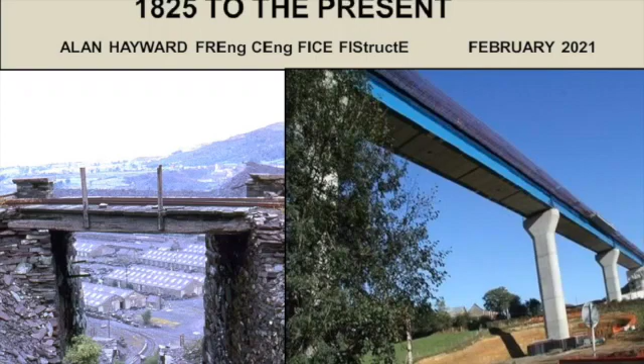Alan Hayward is well known to many of you. His whole career has been in the design and construction of bridges. With over half a century of experience, he's designed and been involved with the construction of more than 200 bridges, and of those, 8 have won national awards. He started his career training with British Railways as an articled apprentice from 1957, worked for various contractors and a consultant, including overseas. When he returned to the UK, he was appointed Chief Engineer of Fairfield Mabey here in Chepstow. In 1983, he co-founded Cass Hayward and Partners, consulting engineers specialising in all sorts of bridges.

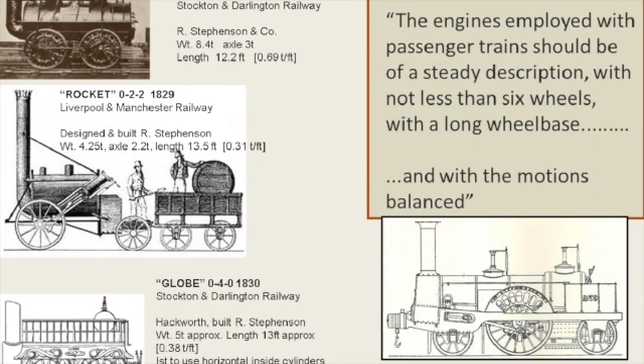Mr. Brunel comes into everything. He was famous on the Great Western Railway from London to Bristol, but he was the civil engineer. He ordered the locomotives and made the statement that no locomotive is to weigh more than 10.5 tons, and if it's above 8 tons, it must have 6 wheels at least. So that's what Brunel said.

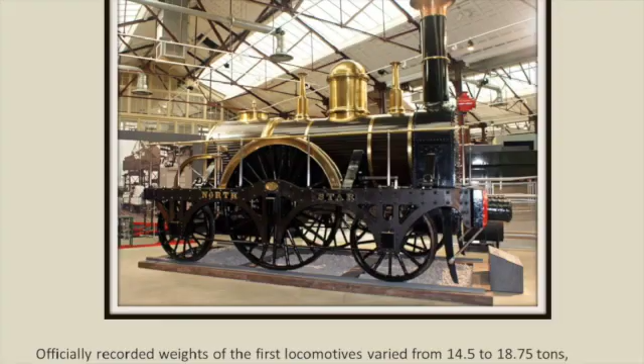But what happened was the first locomotives were a lot heavier. This is a recurrent theme, in fact—things get heavier as you go on, unintentionally. This famous loco, the North Star, built by Robert Stephenson, weighs 18.5 tons, so the weights are going up, and the axle load is 8 tons, so that's going up as well. An 8-ton axle is tiny present day, but it was very big at the time.

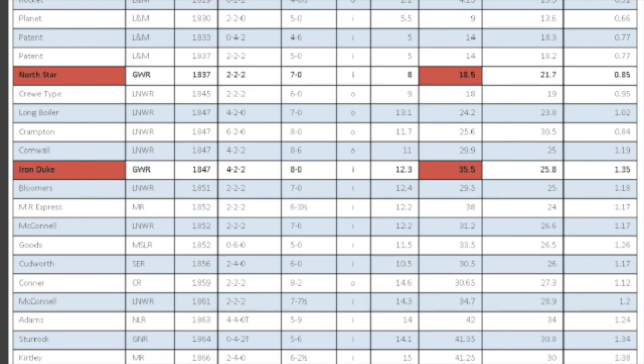I've done a bit of a survey of locomotives over the years. I'm not going to go through all these figures, but this is the middle part of the 19th century. The interesting ones to look at are the axle load steadily going up to 18 tons by 1868, and the weight of the locomotives also going up to approaching 50 tons. So it's a steady increase the whole time. But all these engines were built by all the different railways, of which there were dozens and dozens, all doing their own thing really. It wasn't really a joined up railway.

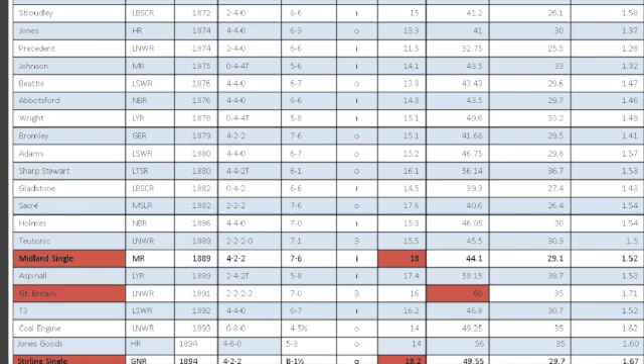Moving on towards the end of the 19th century, the weights of locomotives are going up—we're around 50, 60 tons now, but still around an 18, 19 ton axle load, so that's going up more steadily now. This famous locomotive, the Stirling Single, on the Great Northern Railway from London King's Cross to York—again, big driving wheel—and at least 2 of these derailed at high speed in 1895 and 96. Again, it's the high axle load on doubtful track. This is a recurrent theme.

Just looking at that engine, you can imagine the hammer blow you might get off that. All the hammer blow is on this single axle, so high hammer blow may well have contributed to the derailment—we don't know.

Moving through the early years of the 20th century, the loads are still going up. We're up to a 21-ton axle and a nearly 90-ton weight of locomotive.

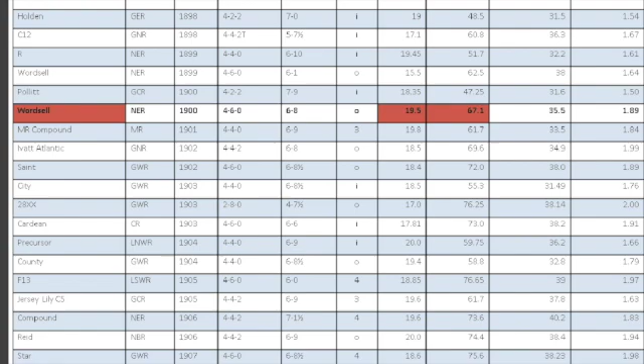And then we get really to the zenith, what I call the zenith of steam, in the 1920s and 30s. These are things some of you may recognize. 22-ton axle now, for locomotives built in the 20s and 30s—the real zenith of railway traction, really, between World War I and World War II.

This moves on towards the present day, and weights are going up, but only slightly now. We never exceed an axle load of about 22.5 tons, but the weights are up at 105 tons, the weight of the Duchess locomotive there, the fourth one up from the bottom. So that's the sort of development.

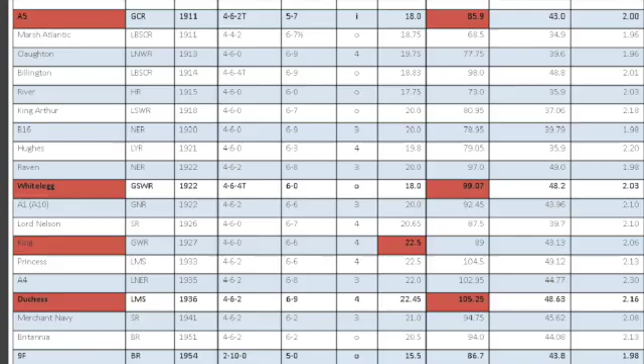And it's summarized there. At the bottom, if we move back, you see the 100-ton bogie wagons. These really came in the 1960s for coal traffic and oil traffic, weighing all up 100 tonnes. I'm speaking old British tonnes here, not metric tonnes—it would be 102 metric tonnes, but 100 old tonnes.

And obviously with a 25-ton axle load, higher than we've ever had before. The loading of these has really overtaken from the locomotives. Up to the 1960s, it's the locomotives that governed everything, the loading, and the carriages and wagons were really much lighter. But the wagons really took over the situation from the 1960s with these bogie coal wagons and oil traffic, and also ballast trains for permanent way work.

And what happened with diesel and electric locomotives from World War II, really—these have never exceeded an axle load of around 22.5 tonnes. But the critical one these days is the one at the very bottom. The Class 67 is more critical for what we call route availability, because it only has 2 axles to each bogie, so 4 axles altogether, whereas most of these diesels have at least 6 axles. Going back a few years, you see one there that's got 8 axles, called a 1 Co-Co 1, and the little wheel at the front was really to reduce the axle loading on a very heavy locomotive.

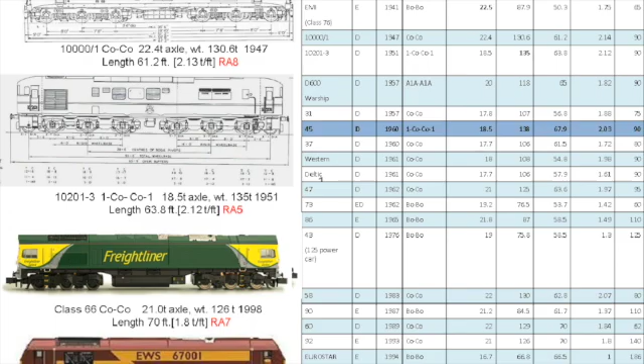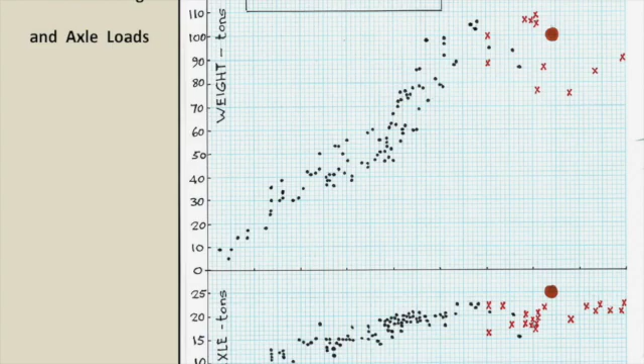This just summarises the development of the weight of locomotives. You can see the steady, almost constant increase from less than 10 tonnes up to over 100 tonnes. The big red blob is the 100-ton bogie wagon I mentioned. At the bottom, you can see the progress in axle loads - again, a steady increase over the years, but flattening off. But these 100-ton bogie wagons dominate now for the loading.

Right up until the 1960s, most of the goods traffic was this sort of thing. These 10-ton coal wagons were everywhere, only weighing 16 tonnes roughly altogether, with an 8-ton axle. So as far as bridge loading goes, really negligible loading.

But of course, these 100-ton coal wagons came along. I took that picture probably 9 years ago now. And of course, the coal traffic at the moment has disappeared. There is some imported coal, but hardly any mined in the UK. So that traffic's disappeared, which I suppose might be a relief to those maintaining bridges and track.

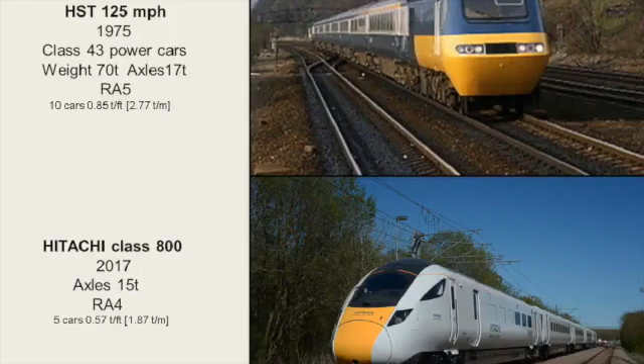But the modern trains we have now - we had the HST, the 125, came in the 1970s, only a 17-ton axle. That really helps for route availability, as we call it, RA5. RA10 is the top route availability for the heaviest rolling stock, i.e. the 25-ton axles, 100-ton wagons.

And this, the later Hitachi Class 800s, running west out of Paddington and north out of King's Cross to Edinburgh, are only RA4, so a very good rate of route availability. On the other hand, they're going a lot faster, so the impact effects are larger.

So moving on to the bridges now. This just tries to summarise some of the developments over the years. In the early years, we had cast iron, used extensively for beam bridges, and or masonry arches, or timber. There were hundreds, if not thousands, of timber bridges all over the system, including many famous ones by Brunel in the West Country. And there are still 9 of those in mid-Wales, actually. But masonry arches, of course, have stood the test of time.

Cast iron, of course, was taken out, which I shall come to. And then you've got at the bottom left what came in - wrought iron and steel, with a very popular method called troughs, where you have the rails set into longitudinal timbers instead of sleepers, sitting into troughs. That was a very economic method of construction, giving you the minimum construction depth. The depth from the rail level to the underside is very shallow, so that meant you could get good headroom over rivers and small tracks and so on. So a very popular method of construction.

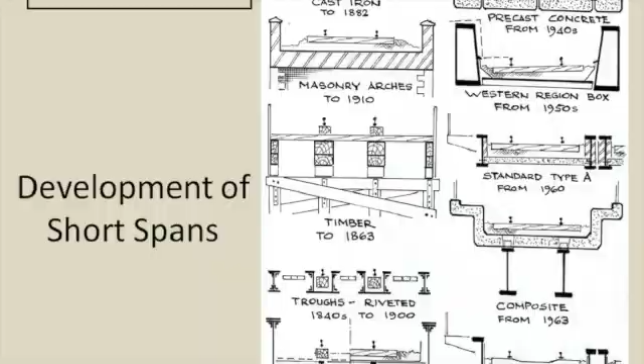Masonry arches, especially the masonry ones and brick as well, are really good for durability. The disadvantage being the headroom, of course - it's very restricted.

Now, I mentioned timber viaducts. There are 9 of these in mid-Wales. This is one of them. These were built in the 1860s and very cheap - the reason they went for timber is it was so cheap. The cost of these, I gather, was between 30% and 50% of the cost of a wrought iron bridge. Very lightweight, of course, timber piles, and took advantage of bad ground conditions really. 9 of them have survived. There are many more that have been taken down and replaced. Over the years, maintenance is quite a problem, and various timbers have to be replaced. These days, Network Rail are replacing using hardwood, greenheart timber, which has a very long life, whereas the originals were built in pine, which obviously has a comparatively short life, perhaps 20, 25 years.

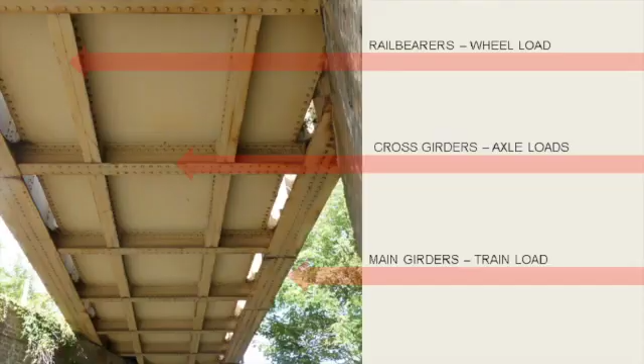Just a typical underview of a typical wrought iron or steel bridge of perhaps the 1870s to 1900. Typical construction - main girders at the side, which is just a half-through type of bridge, cross girders and rail bearers directly underneath the rails. You would sometimes have ballasted track on top, or sometimes longitudinal timbers. The rail bearers are of course critical for wheel load - they're designed entirely for a single wheel generally. Cross girders are critical for axle loading, single axle, whereas the main girders are critical for a whole train - that's pretty obvious. The bearings, of course, are decided on the train load. Notice the bridge is very skewed - there are lots of skewed bridges, and skewed bridges over the years tend to give problems. Things tend to twist, and you get funny things going on at the bearings. But it's a typical method of construction, and there are hundreds of these still around - riveted construction, of course, not welded.

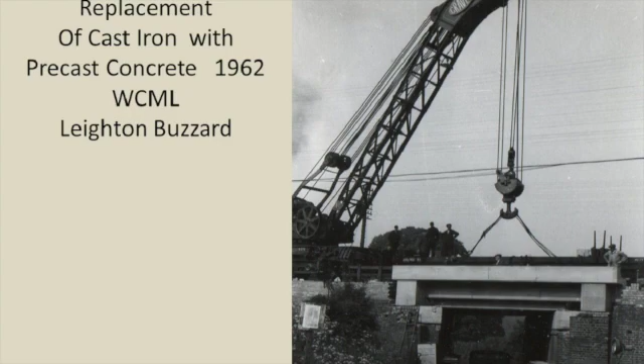Cast iron has survived in places, although it was banned for new construction in around 1870, and banned totally in 1891. Some cast iron beams do survive as edge girders, where they don't carry rail traffic - here you can see one carrying a parapet. I mentioned cast iron was banned totally from 1891, but it didn't happen very quickly - it took about 70 years. This is a bridge I was involved with - I designed this in 1962, replacing cast iron with precast concrete units. This was on the West Coast Main Line. It's staggering that this cast iron did survive until that time.

I mentioned the typical standard type A bridge from 1960 - there are many of these all over the rail system. They were often put in to replace trough construction with longitudinal timbers, which is pretty dreadful for maintenance - the timber tends to rot inside the trough and you can't see what's happening. Moisture collects in there, and the trough sides are not accessible, so you get corrosion, and the whole thing is bad news. Adjusting the permanent way is also a problem, and there have been quite a few derailments to this day - there was one in the last year on longitudinal timbers.

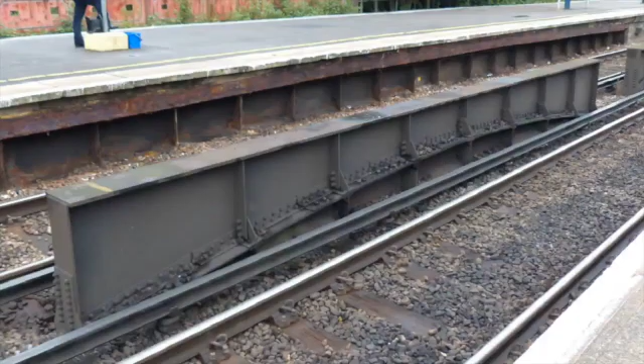This sort of thing has gone on over the years to strengthen bridges. This shows what's called top hat strengthening - there's an old bellied girder originally, and then this additional top hat has been placed to strengthen it. Not ideal, of course, having the girder in what's called the 6 foot space between the rails, especially where you've got the southern region where you have the conductor rail as well. Not an ideal thing for maintenance or accessibility, but sometimes it's what you have to do.

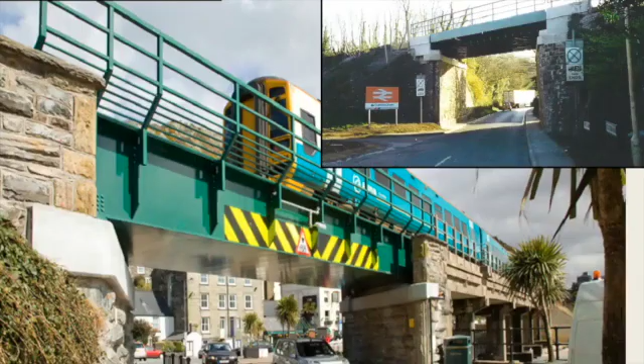I mentioned the U-deck, which has come in from 1997. The very first one we did was at Dunton Green, south of London, and that had an all-steel floor, whereas in later editions we've used a composite floor. The advantage here is the underside of the bridge is totally flush, so it's good for maintenance, avoiding traps for pigeons to build their nests, and quite a nice looking bridge, we think. That's become now a standard network rail design, adapted from our starting point, I suppose. Some of the details they've got on the standard I wouldn't do, I have to say, but there it is. We tend to use our own details.

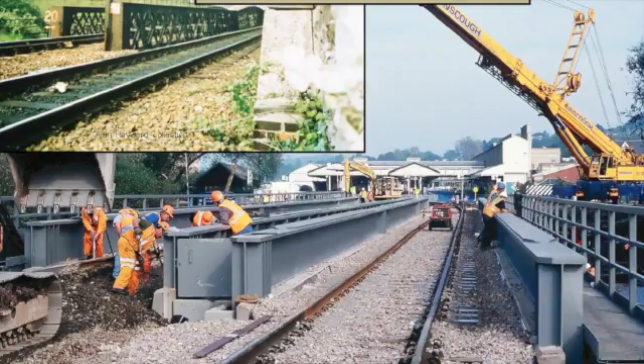And the modern sort of half-through type bridge, you would call a D type, I guess, with a single track between two girders. That, in fact, replaced the River Exe Bridge at Exeter, replaced a lattice girder bridge where there were some brittle fracture failures in some of the members there. So that bridge had to be replaced.

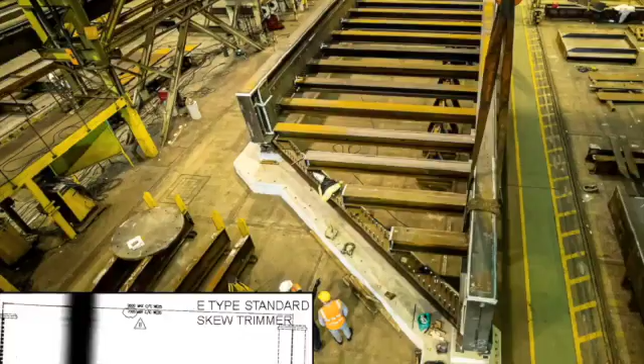Now this is a very recent bridge, in fact on the North Yorkshire Moors Heritage Railway, recently constructed, of what we call the generic E-type, which is an adaptation of the E-type really developed in the early 1960s. We've got our own version of this. I tend to use this detail for the end trimmer - I call this a sit-on trimmer. You can see that the short cross girders just rest on it, so the connections are very easy. And the trimmer goes underneath the main girder, with the bearing underneath the trimmer. That really simplifies the construction.

The little shot bottom left, there's a diagram from the Network Rail standard, where the trimmer they use on skew bridges has 3 bearings - that's to limit deflection - and the main girders have their own bearings. So you've got no less than 5 bearings at the end of the bridge. Well, why have 5 bearings when 2 will do? Trouble with 5 bearings - do they all fit and carry the load you want them to? I somewhat doubt that. So this is a detail I've used on a few bridges now, and it seems to work.

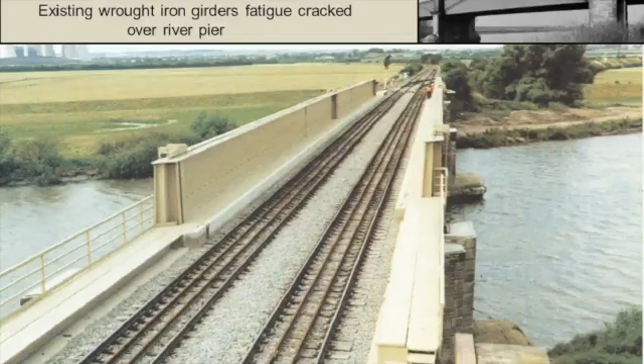This is an example of another one, Gainsborough, in the 1990s, and that has in fact got sit-on trimmers underneath the main span, the main 2 spans there, and underneath these approach spans at each end as well.

And that replaced a very early box girder bridge of 1849 by, I want to remember his name - famous designer, Forth Bridge, Fowler, John Fowler, yes. Wrought iron box girders continuous over the intermediate support, but in the late 80s, early 90s, they discovered some fatigue cracking over the top flange there, so the bridge became life-expired, so it was replaced by this generic E-type, I would call it.

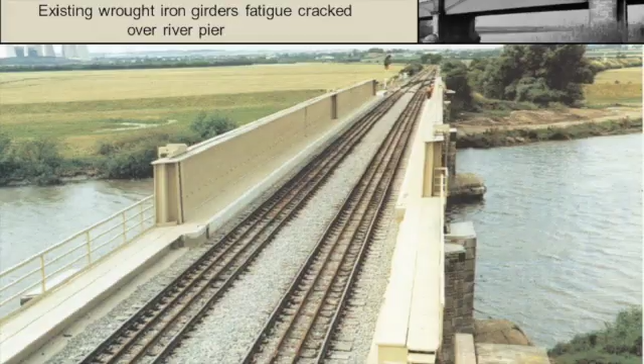Moving more to the present then, high speed has come along. High speed means faster than 125 miles per hour, and some bridges on the East Coast main line have been designed for higher speeds, and of course HS1 was designed for higher speeds of 186 miles per hour, and of course HS2, which is now under construction, will be even faster than 186.

And this effect of vibrations has been known. In France, they found it dislodged the ballast or made some of the ballast unstable, like quicksand, if you like, which is quite dangerous, of course. So to cut that out, they've introduced new criteria for high-speed trains, and that generally means stiffer members. So the members under the floor of the bridge are stiffer to cut down that effect. And also the other effect is comfort of passengers - when you're travelling on a high-speed train across the bridge, you don't want your cup of coffee in your lap.

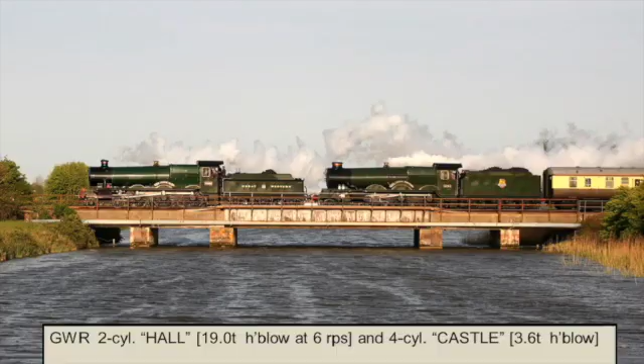I hope on the next batch of bridges the British contractors can get in. So on to bridge loading now. We know the weights of the locomotives, we know something about the bridges - how are we going to design them?

Bridge loading - I've put this on to show that when you've got 2 steam locomotives, you've got some pretty hefty loading on a long span. These locomotives look pretty identical, don't they? But they're different. The one on the front is called a Hall, 2-cylinder, and that gives you a lot of hammer blow because you've got unbalanced motion. The hammer blow is in fact 19 tons on those driving wheels, whereas the latter engine, the Castle class, has 4 cylinders - 2 on the inside, 2 on the outside - and that gives you a balanced system. Everything balances out, so you don't need so much balance weight on the driving wheels. The hammer blow is only 3.6 tons compared with 19. Makes a tremendous difference to the suitability and capacity on bridges.

I mentioned this before - axle loads govern short spans, locomotive or engine loads govern medium spans, perhaps a 30 foot. I'm sorry if I keep using feet and inches, it's a bit old fashioned, I can use meters. Train loads, of course, govern the longer spans where a whole train occupies the span.

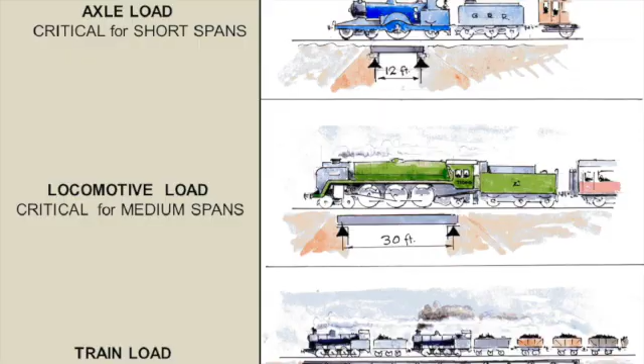So what did people do in the early days? There was a statement made at the opening of the Royal Albert Bridge - that's Brunel's famous bridge across the Tamar. Colonel Yolland said that the normal train loading was equivalent to 1 ton per foot run, and that was what people were doing at the time, the 1830s, 40s and 50s. All they were doing was getting the weight of a locomotive, say 25 tons, dividing it by the length, which if it was 25 feet, 25 over 25 equals 1. So that was the design loading.

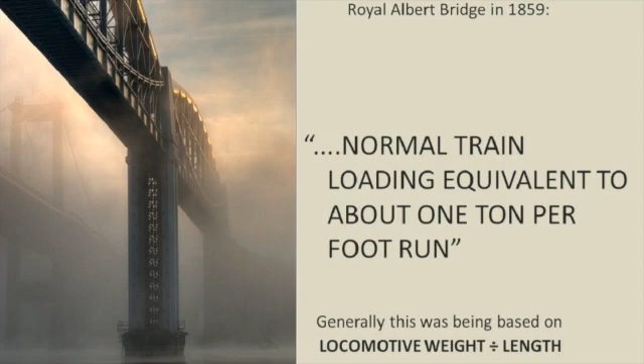They did nothing about the concentration of axle loads, nothing about impact. That was it - you just spread the weight of a locomotive uniformly. Pretty crude, very surprising if you think about it. The design of bridges was actually very advanced - if you just look at that structure, it's marvellous. Everyone knew about structural engineering, how to design trusses, plate girders and everything. But when it came to estimating the effects of a train, it seemed to be totally missing. I think it was because these guys were coming in from building canals and things like that - they weren't really used to high-speed trains.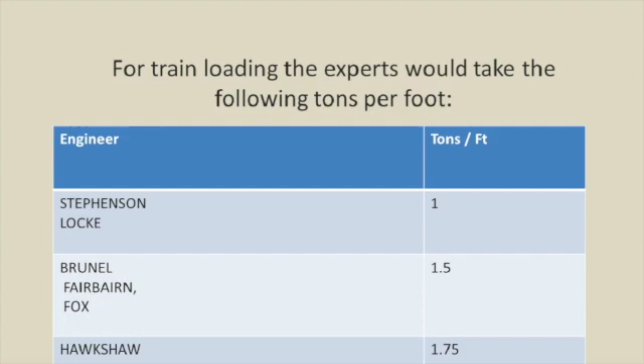So there was a big inquiry about it all, and the experts were called in. What do you do about train loading? Stephenson and Locke said 1 ton a foot. Brunel, Fairbairn and Fox had a bit more, 1.5. And Hawkshaw, who was always a bit conservative, said 1.75. But people were doing their own thing, and that was all they were doing - just the weight divided by the length, with no allowance for impact or anything. Very surprising.

Joseph Locke, another famous engineer with a lot of railways in the northwest of England, said he had heard that the Midland Railway were ordering engines of 32 tons with a wheelbase of 16, which means kind of 2 tons per foot. He said, 'I think it cannot be. I would not consent to it running on any railway of mine.' That's what he said. But remember, at that time we did not have a joined up railway - it was all people doing their own thing. So Locke would only run his engines on his railway; it didn't join up to other railways to any extent. We didn't have a joined up railway system until much later.

There was a report produced in 1849 where they said the factor of safety they expected was a factor of safety of 6 against failure, which sounds quite generous, and I guess it was at the time. But that was a sort of compensation for the fact that they weren't allowing anything for impact, so they just used a very high factor of safety.

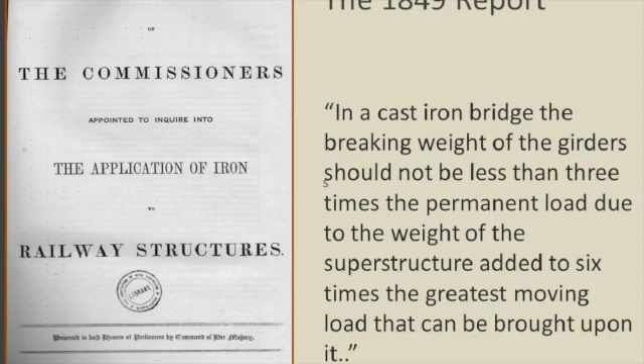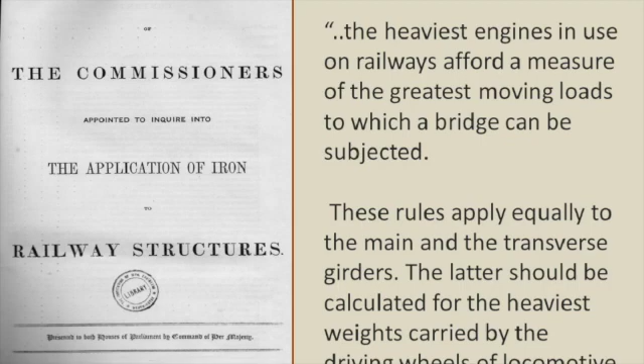The commissioners also said these rules equally apply to the main and the transverse girders, and the latter, the transverse girders, should be calculated for the heaviest weights carried by the driving wheels. So at last, somebody was worrying about axle loads, which is quite something, of course. That was an improvement.

And they also said something about impact. The dynamical increase in bridges of less than 40 feet is of sufficient importance to demand attention, and may even, for lengths of 20 feet, become more than half. So that's suggesting an impact factor of 1.5, which of course is quite an advance. Unfortunately, not many people took notice of that.

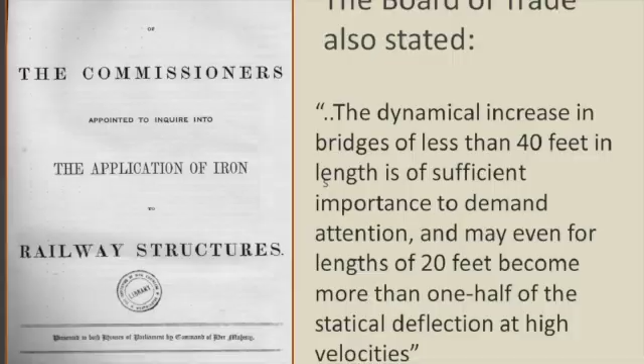People carried on in their own way. We move on to the late 19th century, and an organisation called the Railway Engineers Association, which was all the railways pooling their knowledge. They produced a curve based on different locomotives of different sizes and weights, plotting span against uniform loading, or equivalent uniformly distributed load, which we call EUDL. So this is the UDL equivalent of the different disposition of the axle loads.

That was produced with the idea that all the railway companies, who were beginning at last to get together, could do the same thing. But the interesting thing is the statement at the end, which is worth reading: it is, I presume, intended that the members of the association should use their own discretion in regard to permissible stresses to allow for impact and deterioration. So they were leaving it to individual railways to decide what to do about impact. It just shows the ignorance that was around at the time.

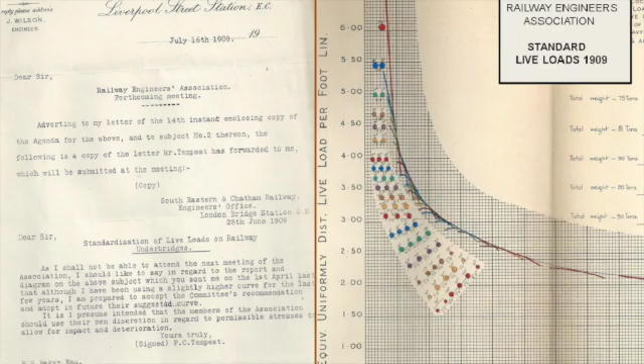I've got here a graph showing the different assumptions for EUDL, equivalent uniform distributed load, against span. You can see right at the bottom Stephenson and Locke with their 1 ton a foot. Then we move through various people, Stoney and Baker - that's the famous Baker of the Forth Bridge - producing their own curves for this.

Then this one shown is the Engineers Association of 1909, the green line. Above that is what's called the 20 units of RA1, which I shall come to, the standard loading we use for the route availability system now on the railway generally, including Network Rail - that's the current loading for assessment of existing bridges. And above that still is the present day loading that came in after steam trains disappeared. In 1973, what's called UIC 71, or RU, came into BS 5400. That's another big increase, and you can see the enormous increases.

And this is just static load - this has nothing to do with dynamics. It's just a static load, span against EUDL.

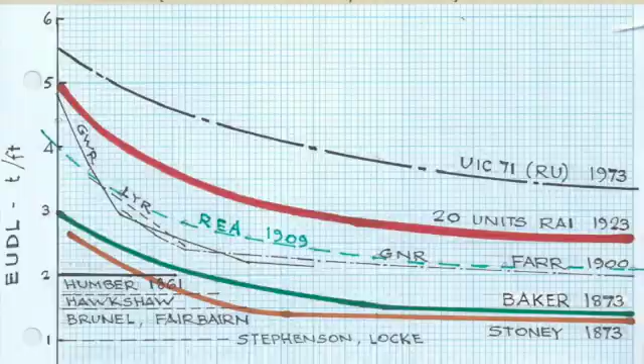But some formulae were around due to various sources. Pencoyd, an American formula - this was an impact formula, an increment. In other words, you add this little figure I to the static loading to get an increment, so you add 1 to this I, and 1 plus I is the impact factor. Then the Ministry of Transport did some tests in 1921 and came up with a little formula. And in the first edition of BS 153 in 1923, a very similar formula, slightly updated, was produced. So as late as 1923, this is all we had about impact.

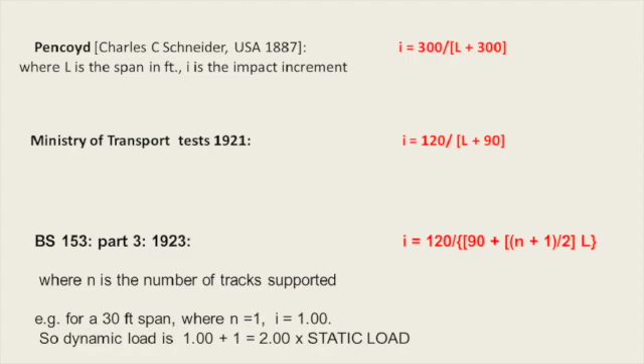But if I hark back to the commissioners, back to 1849, if you look in their Appendix B, which had 83 pages - it takes a lot of reading actually - hidden in that document in 1849 is this little formula and this little table. And that gives you really everything you need to know. It's the impact - it brings span squared into it, it begins with V squared, which is speed, and deflection is the deflection under the static load. That's taking into account all the imponderables, really.

At the time, of course, it was only applicable to short spans and very low speeds, but I've tried extrapolating it by curve fitting. I came out with a little formula, and it's actually pretty good. It's a mystery to me that this was produced in 1849, but nobody seemed to use it - probably because it was hidden in between 83 pages of small writing.

There were some tests done in 1921. Everyone was beginning to get alive to impact now, and they did a lot of tests of different locomotives on different places on bridges, with all these different test results. They produced a curve in 1921, which is the one I just showed you, a little formula.

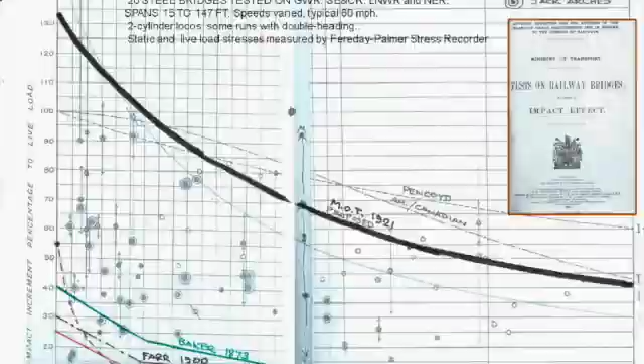So things were progressing a bit in the 1920s. In 1923, the first what we call RA1 loading. This again is just static loading, and it very much looks like two freight engines pulling a train of trucks, which is what it was. That loading was developed to represent typical loading at the time, on which you could base bridge design.

And that loading, funnily enough, is still used today. It's still used by Network Rail to assess their current bridges on the basis of an equivalent uniformly distributed load to this loading. It's just a load system which you convert to an EUDL. If you take 20 units of it, that's equivalent to RA10, which is the highest classification used for assessing bridges, and that's equivalent to a 25-ton axle load.

Going down in number of units, 10 units of this standard loading is equivalent to RA0. You just take 10 off. So 20 minus 10 is equal to 10, and 10 minus 10 is equal to 0. That gives you the RA route availability, and there's the equivalent axle load to that.

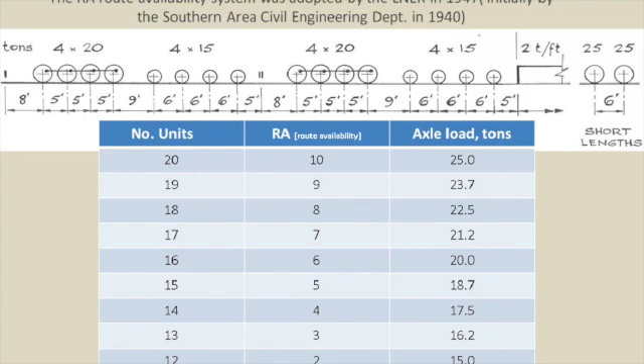So you can see you go from 25 tons down. It means that most of the current locomotives around, which have a maximum axle load of around 22.5 tons, are around RA8, sometimes lower. That's a typical classification of modern locomotives. The multiple unit trains, of course, are a lot less - more like a 16 or 17 ton axle load, so you're around RA5, RA4. So that whole system is still used today, although it goes back to 1923. There has been talk about updating it, but it's never happened.

So we come to the question of hammer blow. At last, there was a major breakthrough. After the First World War, there was a committee got together of the four mainline railways from 1923 to write a report and do some extensive research into the whole question of impact effects on bridges.

The main effect, of course, with steam locomotives at the time, was the effect of so-called hammer blow. This is due to the balance weights which are put on the wheels to counteract the reciprocating masses moving backwards and forwards, and this produces this alternating kind of loading on the rails. The bit above the static loading is called the hammer blow.

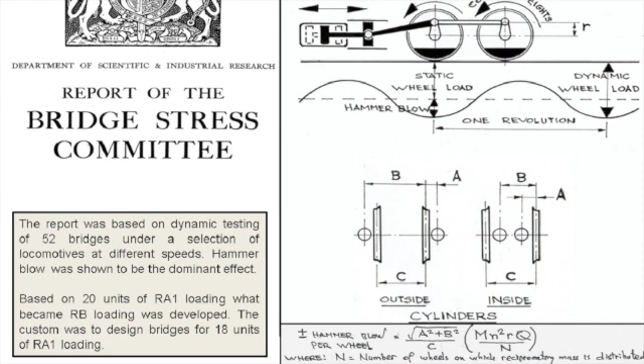Hammer blow is a bit of a misnomer - you imagine a guy banging with a hammer, but it's not actually, or shouldn't be, the wheels lifting off the rails. It's just a local increase due to the effect of the spinning wheel and the counterbalance effect of the balance weights. You can write formulae for these things, and there are various formulae around, but that's one of them. It depends whether you've got outside cylinders on the engine or inside cylinders - it makes a difference. They tested 52 bridges all over the railway system under many different locomotives, which had all sorts of different hammer blow characteristics, and came up with some results.

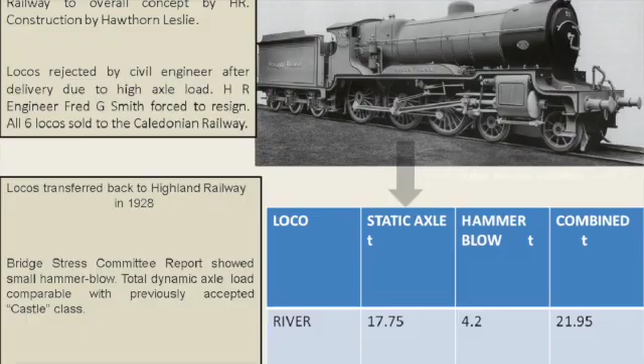Now, there are other effects, of course, not only vertical loading on railway bridges. One effect, particularly from steam locomotives, is lurching, which is really a rocking movement from one rail to the other that you tend to get. Particularly, 25% of the load on one wheel can be transferred to the other wheel. So that's a matter for design.

The Eurocode has got a similar thing, only it's not really the same, but it's called eccentricity of vertical load. It's saying that the track might be in a slightly different position, and that gives a somewhat similar figure. You could sort of confuse that and call it lurching, if you like, but it's not quite lurching.

There are other effects you get, horizontal effects on bridges, centrifugal effects, obviously on curved track - that's a fairly easy thing to calculate. Wind, of course, is a thing we need to think about. And a thing called nosing. Nosing: as the train gets along the track, it tends to shift so the flanges bear against one rail or the other, depending on discrepancies in the track and the rolling stock. So you get this effect called nosing.

That wasn't introduced till 1946, came along very late, actually. One of the reasons for a lot of the early bridges being rather weak in plan is that they didn't really appreciate nosing. So it's been the downfall of some structures. But that force was, from very early times, called 10 tons. It's a bit judgmental - I don't think 10 tons has ever been recorded. But it's now 100 kilonewtons in the Eurocodes, and it survived. No one's ever changed it.

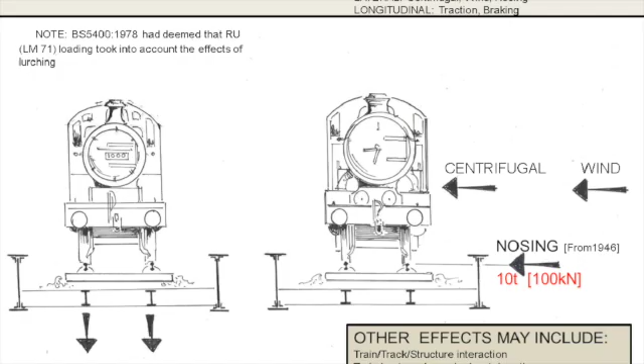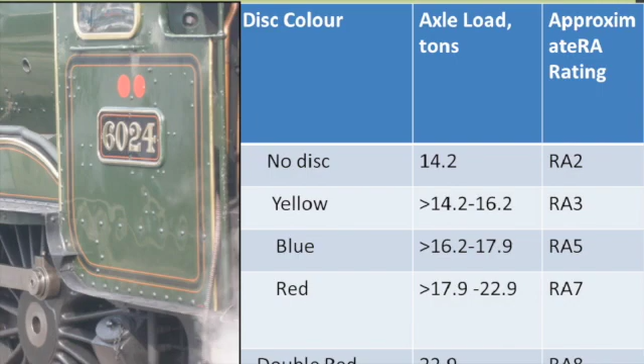Now, there was another system around on the Great Western Railway. Instead of route availability, they had this other system where they painted little circles on the side of the engines to denote their route availability. So this engine was called a King class, had 2 red circles, and that meant it was banned from certain train routes because its axle load was nearly 23 tons, and we would call it RA8 now on the rest of the system. These various other colours meant different routes, and they had a map.

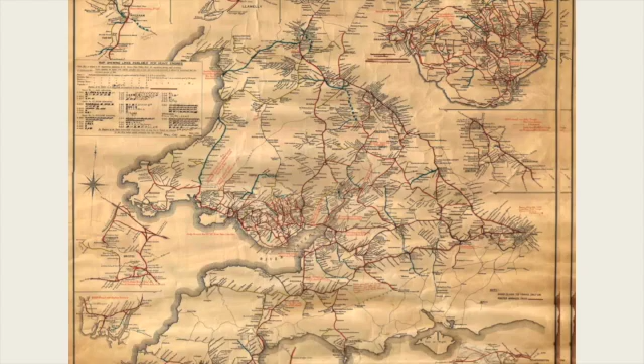A route availability map, going back to 1920s, showed these red lines, and some of them are double red, and you can see the Mid Wales lines are blue. These were where all the timber viaducts are that I mentioned, where the route availability was a lot less, so you had smaller locomotives with lower axle loads. So that system went on. I mean, it doesn't exist now.

So we come to the modern loading. What is it? Instead of the previous loading I've shown from 1923, with the getting rid of steam, a new European loading was developed. This was developed in Europe, but with a lot of involvement from the British as well.

So many of you will be familiar with this. It became part of BS 5400. It was called RU loading at the time. So that's what's used today, and it actually represents a double-headed heavy freight train hauled by diesel locomotives. That's what it represents in terms of bending moments and shears on a range of spans.

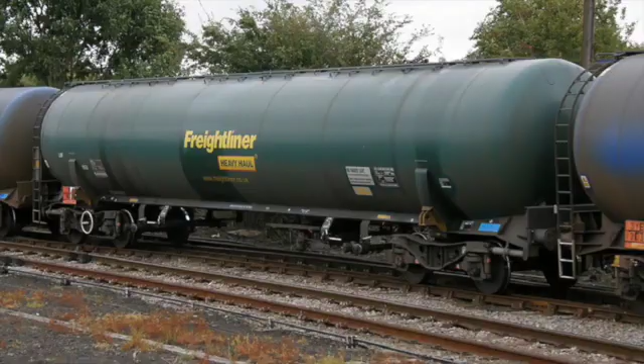What you do for designing new bridges is this phi, which is this very simple formula, but that is based on Psi1 plus Psi2 for a range of different speeds and trains. It was actually based on a 13-year-long ORE investigation in Europe, from different trains at different speeds: high-speed trains at 300 kph (186 mph), loco-hauled passenger trains at 155 mph, and heavy freight trains at 75 mph. They bundled all that together and ended up with a curve, like that. So that's the basis of it.

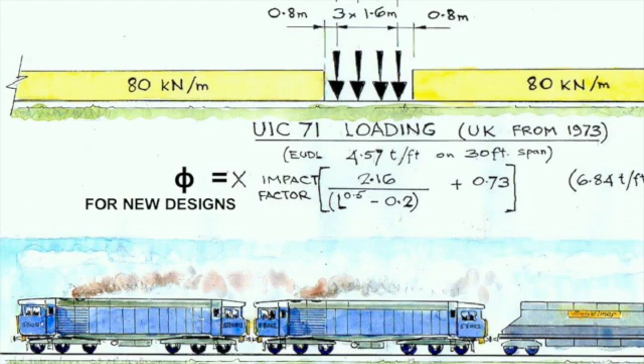It's quite important to know where that all came from. It's been written up in a paper in the Institution of Civil Engineers, 1974, a discussion chaired by Dr. Spindel, a famous railway engineer at the time, who was involved in a lot of this development. So that's the basis of the dynamic factors which went into BS 5400 and then into the Eurocodes, and of course is current today.

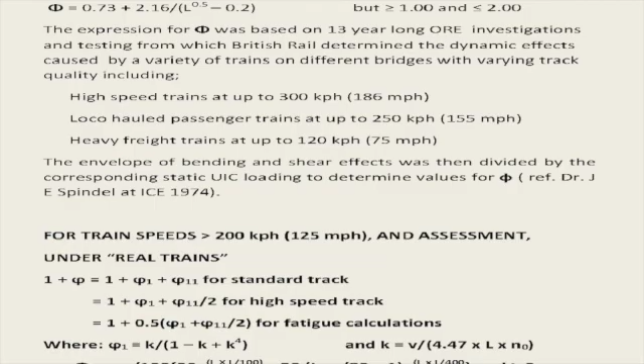So I've just shown there the dynamic increments, and you can see here this Psi1 and Psi2. It changes at 100 miles per hour, because when you get to a 100-mile-an-hour track, the track's maintained a lot better, so Psi2 is a reduced figure - that's why you get this jump.

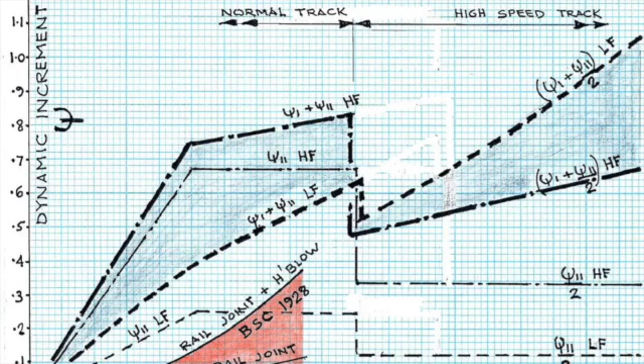Just the red hatched area is the steam train stuff - in other words, they were only going up to about 80 miles per hour. That's as far as they got. And the 1928 report I mentioned, the extensive testing of 52 bridges, this is what they came up with - the impact a lot less. But then they were only going up to 80 miles per hour. They didn't do much about the track irregularities - they did something about rail joints, but not much about track irregularities, in other words the Psi2 bit. So that explains a lot of the difference.

Now this is EUDL, equivalent uniformly distributed load, including dynamic effects - so that's everything thrown together. Span against EUDL, and you can see way back to the dawn of time you're on 1 ton a foot, and you should have been applying a bit of impact, as they said in 1849, up to 1.5 at short spans, about 1.2 or so at a 40-foot span, and then down to nothing for long spans. Whereas 1928, which is the RA system including impact, was called RB loading in BS 153. RB loading is in fact RA20 - 20 units of RA1 loading with impact for steam locomotives, and that's what you got there.

This was another early formula which was a bit conservative. Whereas today, the UIC 71 static loading is 71, but for modern bridge design, Network Rail current rules require you to multiply by 1.21. Why? 1.1 of it is for possible future traffic growth, and another 10% - I call it 10% for luck - is to account for possible difficulty in future maintenance, in other words degradation. So that's 1.21. Network Rail now makes you design to this, which is a very big increase. In a way it's trying to be long-sighted and looking to the future, but it does seem a bit conservative.

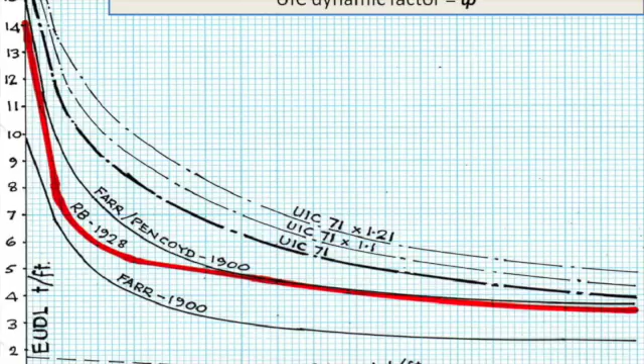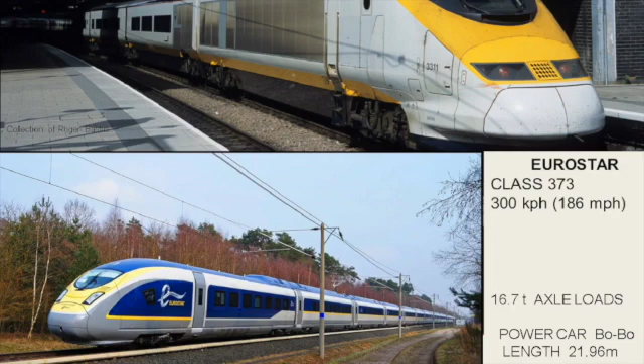And of course now we have high speeds - the Eurostar here, and the current version of it, speeds up to now 320 kph, over 200 miles per hour. So what do we need to do about that?

One of the things we have to worry about is additional vibration effects causing acceleration of the bridge. On ballasted track that can cause instability of the track, which could be dangerous - they've had experience of that in France. So on these high speed lines, more than 125 mph, more than 200 kph, we sometimes have to do a dynamic analysis, and very often will have to do that on high speed lines.

Whereas if the speed's 200 kph, in other words 125 mph, in general we don't have to do a dynamic analysis - we can do all the normal things, take the current loading, the LM71, and apply the phi factor to it, and that's it, that's all we need to bother about. But on a high-speed line, under certain conditions - does it comply with certain natural frequencies, etc. - you may have to do a dynamic analysis, and from that you get the acceleration and decide whether your bridge is okay or not. If it's not, you have to beef up the design.

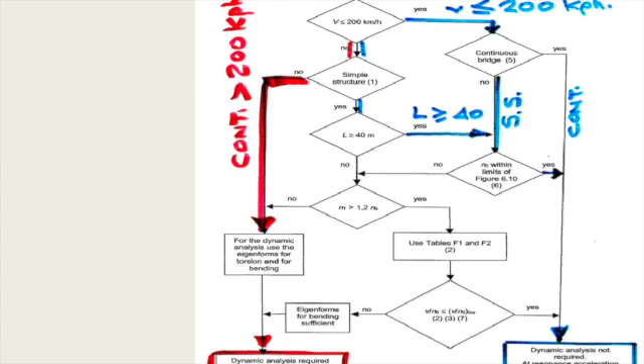So we can't run trains at more than 125 on those bridges without doing a lot of strengthening work. And some of these bridges have, of course, been replaced. For example, on the West Coast Main Line, some bridges have been replaced for that reason.

I've given this deck acceleration criterion, 0.35 G on ballasted track, whereas in France they found at 0.7 G they were getting destabilized ballast. So it's a sort of factor of safety of 2, halved it to 0.35. On direct fastened track, that is slab track, no ballast, which is what's being done on HS2 — they decided to go for slab track — the criterion there is 0.5 G, which is half of 1 G. At 1 G, the wheels could lift off the rails, so that's the idea, to avoid that. Factor of safety of 2, we'll have it as 0.5. I don't know how arbitrary these figures are, but that's what they chose.

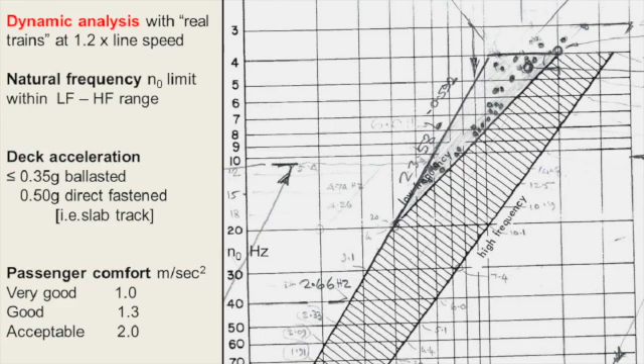If you go for this dynamic analysis, if you have to do it, you have to use the Psi 1 and Psi 2 up to these high speeds, and you compare the loading you get with what I call the traditional loading, and also do an additional fatigue check. So you can see, for high speeds, it's getting quite complicated.

I'll just come to bridge failures now. We're over an hour now, so I'm running out of juice, I think. Bridge failures, these are important. This one collapsed in Southern Ireland about 15 years ago.

Really it was longitudinal timber track, the old enemy, and pretty bad condition of track. The train came off and destroyed all these cross girders. No casualties — it was a freight train, fortunately, no passengers. But bad news.

I've listed here some of the bridges that have failed. There's comparatively few, actually, that have failed under traffic. You'll notice I haven't mentioned the Tay Bridge, the famous Tay Bridge of 1879. That failed with a train on it, but the loading that caused it was really wind, not really the weight of the train. There might have been a bit of wind on the train, but really it was a wind failure, and of course it was a badly designed bridge and bad workmanship as well. It's a well-known failure.

Of these failures, out of this little list, 5 were cast iron girders, and all of those 5 had a casting flaw, a blowhole if you like, in the tension flange. Modern technology could detect faults in cast iron by non-destructive testing, but in the early years you had no way of knowing when you had a flaw.

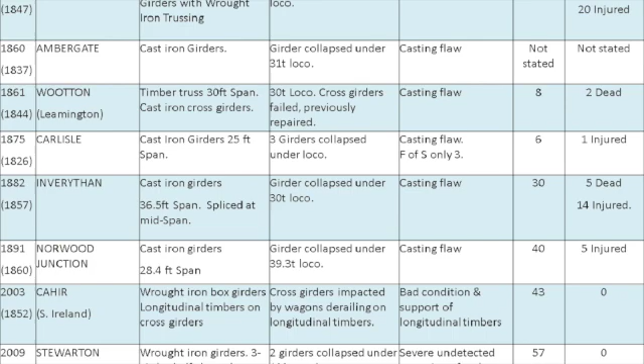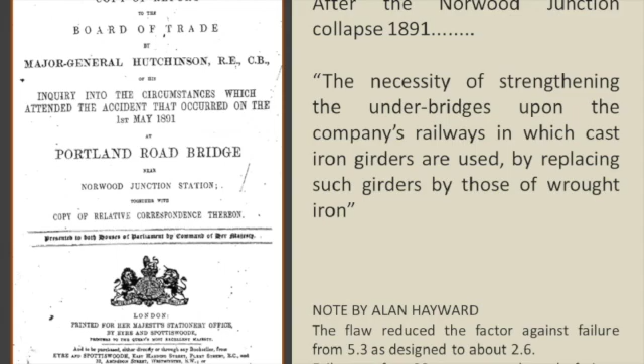After that, the Board of Trade produced a report saying get rid of cast iron - the necessity of strengthening the company's railways in which cast iron girders are used. That went national over the whole British rail system, and people began to replace their cast iron with wrought iron or steel. But as I mentioned earlier, it took until the 1960s to get completed.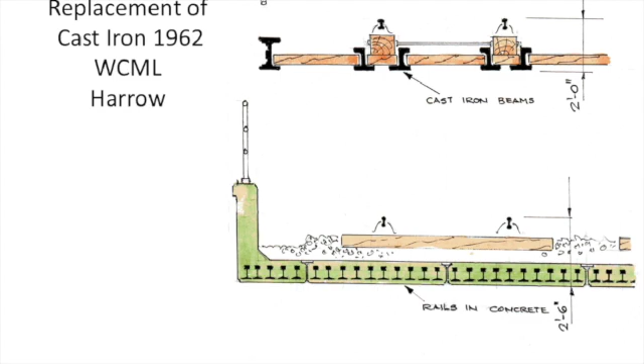That's just one I was involved in, 1962, on the West Coast Main Line - cast iron beams replaced by this unusual arrangement, rails in concrete, a very shallow method of construction. I often wonder about using second-hand rails in that configuration, but if any one of them fails, at least you've got 9 more to take the load. Perhaps not something we'd get away with now, using second-hand rails.

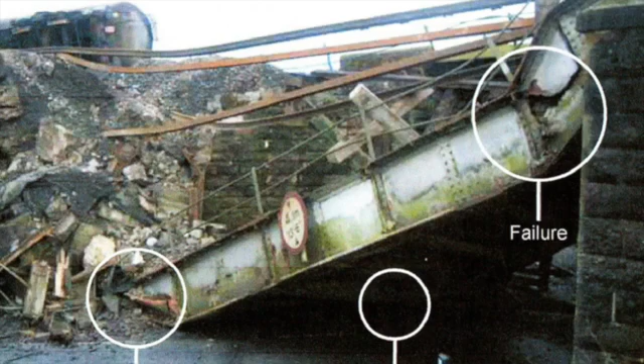This was the one I mentioned, 2009 - total, this was an absolute disaster. Under a freight train doing 57 miles per hour, 100-ton wagons with 25-ton axles, so it was our friend the heavy axles again. Notice the classic horizontal shear failure there, and this was due to a line of corrosion all along the web, because the inside of that web could not be seen for inspection.

There's the train across the bridge, 57 miles per hour. The locomotive got across the gap because the axle loads were only 21 tons, but the heavy wagons with 25-ton axles failed the bridge - four heavy axles there.

We got this classic failure. The problem was all this ballast, which was covering up the sides of the girders, and there was various sorts of timber cladding, stopping you ever inspecting it.

The other fault was that an assessment had been done of the bridge, assuming that the webs of the girders were half an inch thick. Well, they weren't - they were either 3/8, and for the edge girder, which failed the most, it was only 1/4 inch. So there was a mistake in the calculations for the assessment - not the original design, the assessment, which was a pity. Bit of bad luck really for Network Rail, because they'd already decided to replace the bridge, and the new one was already made, but it hadn't gone in. So meanwhile, the failure happened. That's been a real wake-up call, I think.

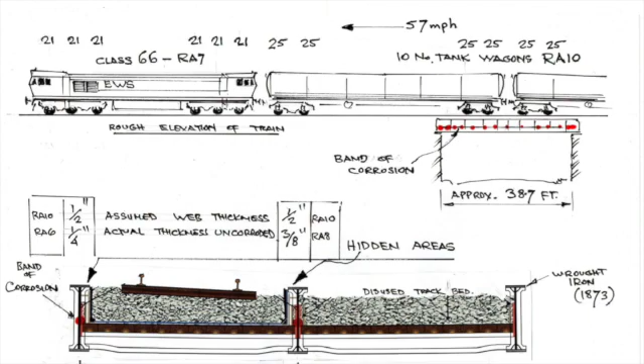The problem was lack of maintenance, and the timber wasn't in fact one bulk of timber - it was 3 timbers side by side, only screwed together very crudely. So you had literally a pack of cards. When you got a sideways force due to nosing, that would just push this sideways. There was hardly anything in the sides of the timber - remains of some old asphalt and a few timber wedges. The thing had been like that for months.

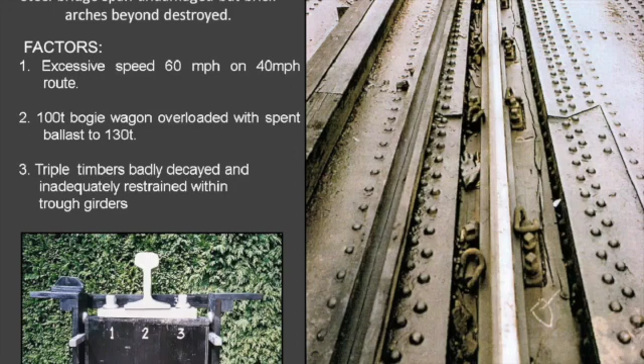There were 3 causes. The speed of the train was 60 miles per hour and it should have been 40, so it was overspeeding. The bogie wagon should have been 100 tons, but it was actually loaded to 130 tons with spent ballast - overloaded. And the timbers were badly decayed. I always think accidents are caused by more than one cause, and you've got 3 causes here, all contributing. But the one which really was the main cause is the bad timbers - it was an accident waiting to happen.

What about historic factors? We're nearly through now. Historic factors of safety - in the early days, they were assuming enormous factors of safety. On the other hand, we now have heavier loading. So did the high factor of safety compensate for the increase in loading? Well, the answer is, to an extent, it does. In cast iron, it doesn't - immediately the safety factor dropped off rapidly because the loading was going up, and you got to a point where you would get fatigue failure. Cast iron is hopeless in fatigue, and so that was totally unsafe and inadequate.

In wrought iron or steel, if you assumed a bridge - this is all an assumption - it just assumes 30-foot span girders, and this is only an example, if you like, and it assumed a certain dead load, which I've just assumed something.

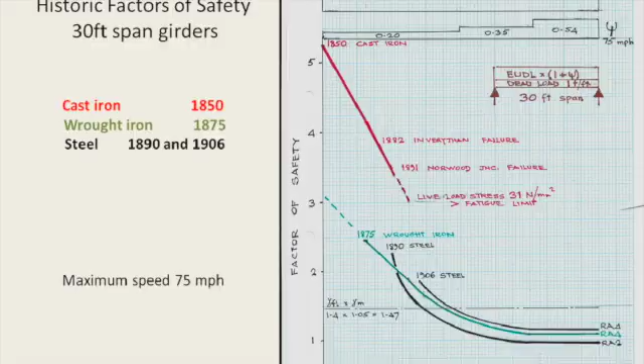It has meant that a lot of these bridges have survived, but with reduced loading. I'm going to finish on fatigue.

But the good thing about cast iron is, though it's got a poor performance, if you use very low stresses, it's got infinite life. Whereas for steel and wrought iron, the way the code works, you get a steadily diminishing curve, so you'll have a finite fatigue life - a much better fatigue life, but it does have an end to it. This is based on the previous code BS5400, which has been replaced by Eurocodes, but it would be a very similar pattern.

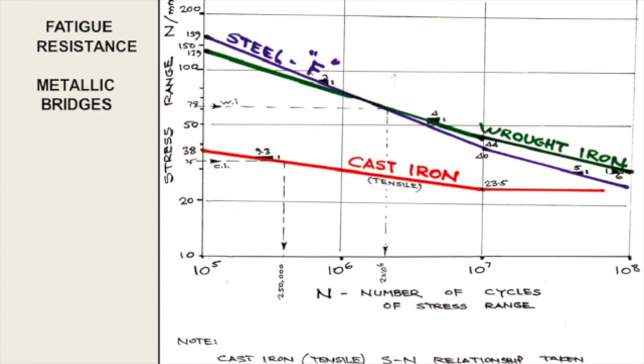I'm just going to finish with an example of fatigue. I've mentioned the standard box girders, originally called the Western Region box girders. These on the Western Region originated - they were called the Llantarnam type from 1969, because the first one was at Llantarnam, near Newport in South Wales. That's the first one, went in 1969. I think there were about 8 or 10 of that style, and then the design got modified later.

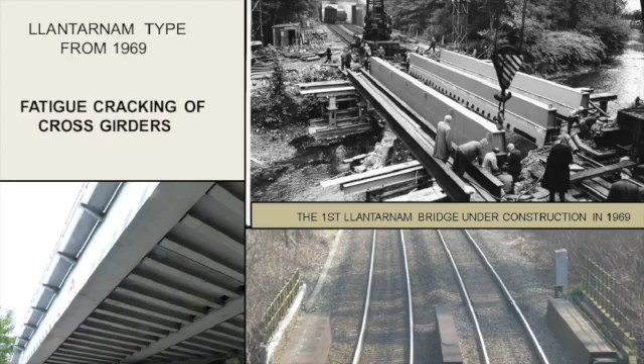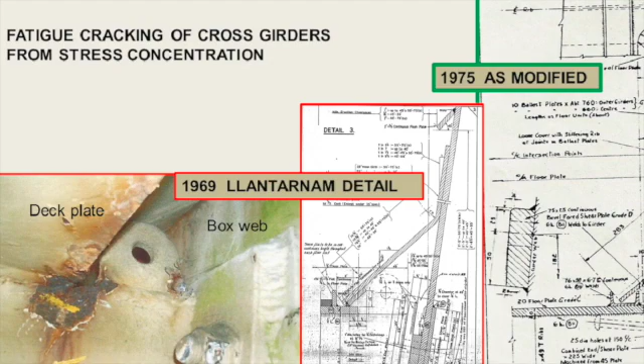And the Llantarnam detail is an unfortunate detail. You can see here the side of the box, a sloping side, and this is a ballast plate laid against it to keep the ballast away. The cross girder comes in here, and the floor plate stops just short of the end of the cross girder. So you've got a discontinuity there in cross section, an enormous discontinuity. And the thing is welded, of course. So any welding there, you will easily get a nick - a welding discontinuity - and then probably an inbuilt residual stress, which will be in tension. So you probably had an inbuilt problem from the start.

You can see what's happened - you can just see the fatigue crack, which has propagated down the web. The bridges haven't failed, but some of the cross girders have got this pattern of failure.

Whereas on the right-hand side - I'm sorry, this has almost jumped out of the side of the screen - but I think you can just see in that plan view that the floor plate is in fact shaped. You can see that scalloping there. So the floor plate actually does continue to the end of the cross girder, so you haven't got the discontinuity. So the bridges built in this 1975 modified design are okay. It's just these early 1969 ones that have failed.

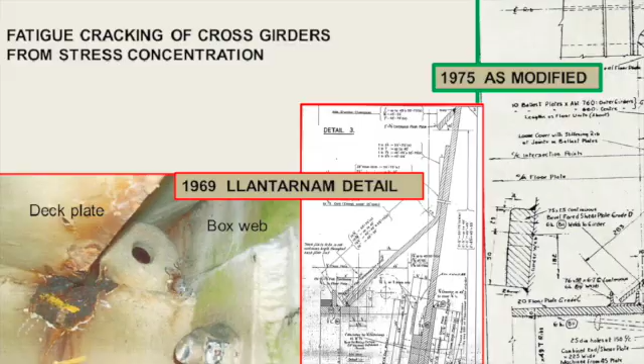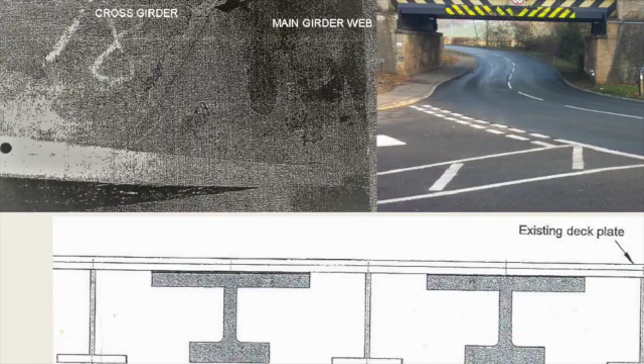What's happened is one of them, some 10 years ago now, has been repaired. The repair was to insert new cross girders between the existing ones, which aren't welded because it's impracticable to try and weld overhead there. These fabricated cross girders have gone in with an elastomeric or rubber strip to take out any unevenness of the floor plate. So it's a quite cleverly designed replacement.

My opinion, it's a temporary measure. I can't see that lasting a long time. I can see this thing rattling about. I'd quite like to go up to that bridge and just see what goes on. It wouldn't surprise me if there were some movements and rattling going on, but I may be wrong. I believe the other bridges of this type are being monitored by Network Rail, and I think at the moment they're deciding what to do about it. But to my mind, this repair, although it's very ingenious, and there was a paper on it in the Civils, I would regard it as a temporary repair.

I think the future on a lot of these old bridges could be fatigue problems.

And I'm going to complete there. In conclusion, the American engineer Waddell, a famous engineer, made a famous statement: the life of a metal bridge that's scientifically designed, honestly and carefully built, not seriously overloaded, and if properly maintained, is indefinitely long. That's a very profound statement, actually. If you do all those things, your bridge could last forever. But if you don't do one of those, then it won't. Thanks very much.

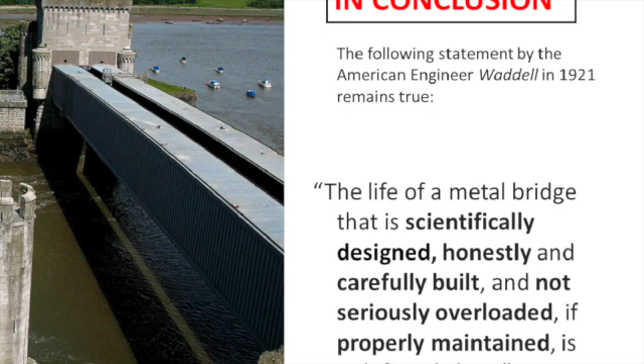Thank you very much, Alan, for a wonderful talk. I've forgotten how much I enjoyed the first time I heard the talk when you presented it to Cardiff about, I don't know, 7 or 8 years ago, and especially your line drawings and watercolours.

One of the comments from the audience, among a few questions, was not only is it interesting, but wondered whether you ever thought about writing a book. I think he suggests it might be a good read.

Yes, there is. It did get published by the Newcomen Society. I think it was called Train Loading on Bridges Since Stephenson's Rocket. And then it also got published in Bridge Engineering, the Institution of Civil Engineers journal, going back about 6 years, I think. So you can find that. So it's been written up to that extent, but it's not a book. It's a paper, if you like.

Now that's great. And then somebody else has commented that now they've seen the charts, all the various numeric information in the Network Rail standards now makes sense. So that's quite good. I wonder whether that sort of publication ought to be made a bit more readily available to users of some of their publications.

Yes. Sorry, yeah, there is a question. There was an informal discussion, published in the Civils in 1974, hosted by Dr. Spindle, a famous rail engineer at the time. That's worth getting, because that tells you where these impact factors came from. You can look in various European research papers, but they're quite hard to get and to go through. But there's a summary given there by Spindle, and it's excellent.

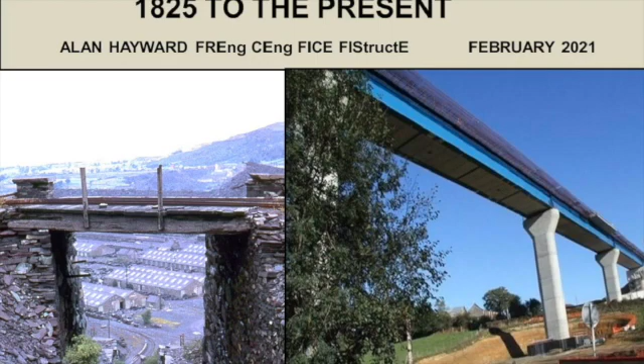Okay, that was the other half of the question. So well anticipated. Well, that's all the questions, Alan, which thank you for those. Alan, that just leaves me. I don't believe I've forgotten anything else. I will have a little look to see if Kirsten, or nope.